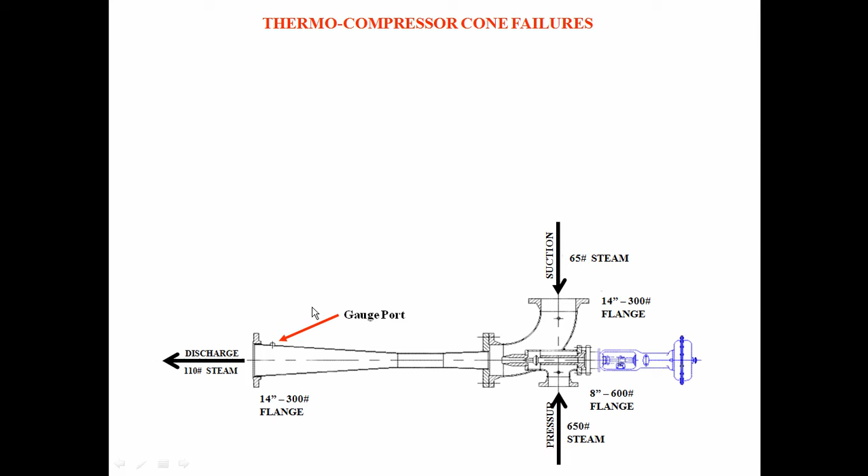Alright, here's the thermocompressor cone. Now what this component does is it takes steam from the powerhouse portion of the paper mill and sends that steam to the paper machine in varying degrees of quality and quantity based upon the requirements of the paper machine during the paper making process. Now this is a new system that has been started up for approximately 2 months prior to the initial incident.

The initial incident occurs at this gauge port. Now this is a field installed gauge port. It's a 3/8 inch threaded half coupling that they're using for a thermowell. And what happens is a crack develops in the fillet weld of the thermowell, goes all the way around it, and propagates into the base material of the thermocompressor cone. Now this occurred approximately 2 months after startup.

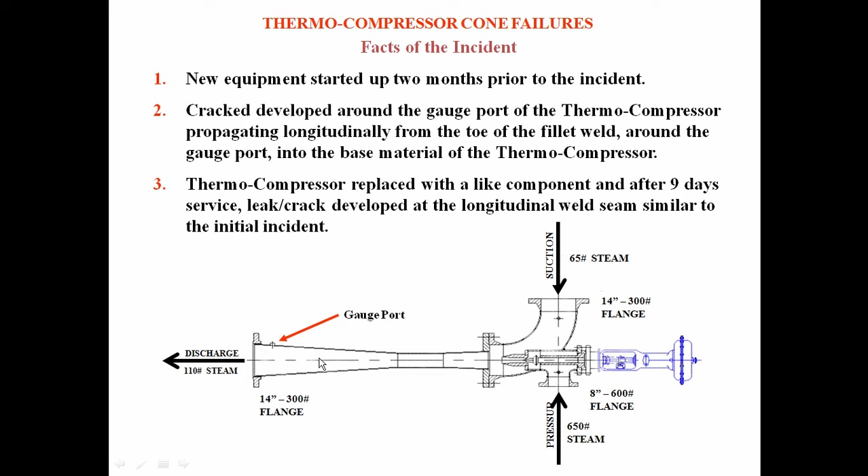So they change it out with a like component. This time they left this gauge port out in an attempt to fix the problem. But what happens now is after only 9 days, a crack develops in the seam weld of the thermocompressor cone, goes in this direction towards the large end to the toe of the seam weld, and propagates into the base material. Then it goes in this direction right down the center of the weld and makes this big Y pattern. And this is what the two failures look like.

Now this is very unusual to me. The weld should structurally be the most sound part of this component. So how can the crack go down the center of the weld and then into the base material? I'd be happy if the initiation point was over here in the toe of the weld, but the initiation point turned out to be over here in the center of the weld. So these are some answers that we're going to have to find.

Okay, let's look at how we analyze this problem. We have reoccurring thermocompressor cone failures. Since we have two failures, that makes this chronic, therefore reoccurring. And we've got two known failure modes. The welds have failed, and the base material has failed. And we have to account for both of these in order to solve this failure.

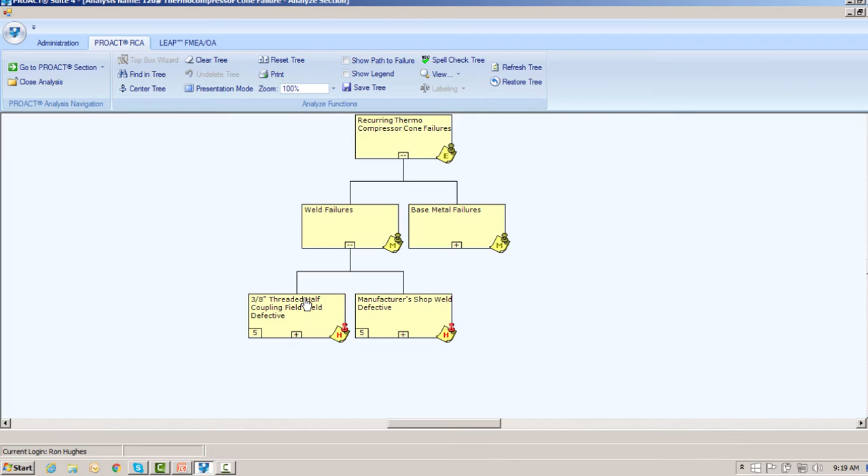So we ask the question, how can the welds fail? Well, we've got two welds. We've got the field weld that was made on site for the 3/8 inch threaded half coupling, and we've got the shop manufacturer's weld. Now we do 100% RT on the welds, and obviously they failed. And we asked ourselves, okay, we'll start with the 3/8 inch threaded half coupling. That was the first failure.

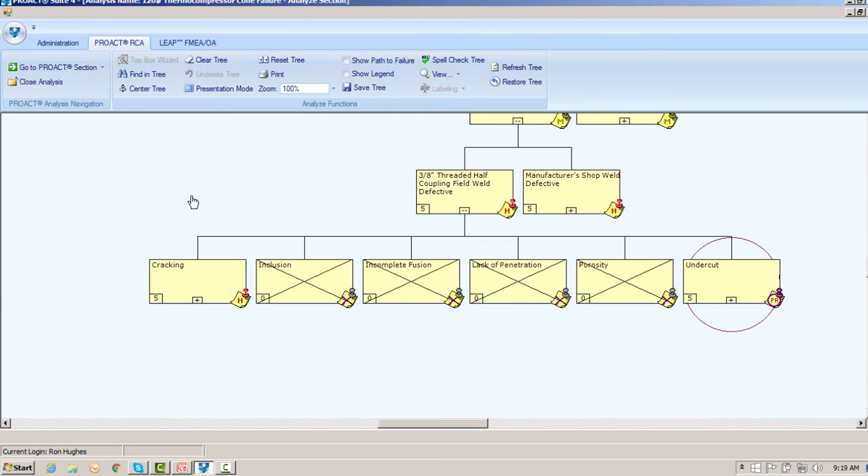How can that happen? And we say, okay, standard defects in the welding industry. Standard defects include cracking, inclusions, incomplete fusion, lack of penetration, porosity, and undercut. Okay, now I really don't need an RT to see the crack. I do that by visual examination, verify it. The outcome is, okay, cracking is evident by visual examination. And if we look at it, we can look at the crack closer. And here you can see it.

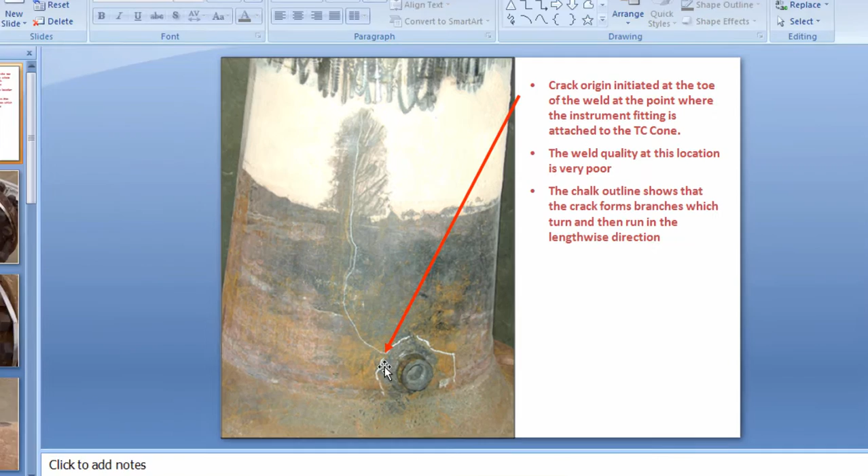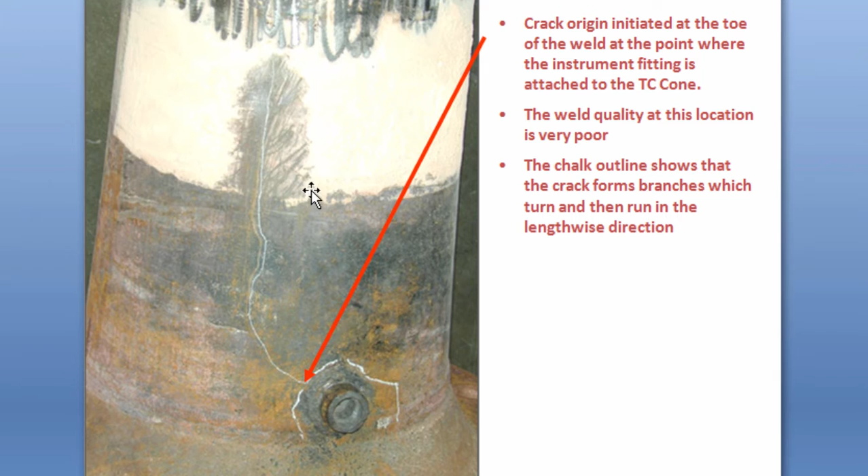Now aesthetically, this is a very ugly weld. However, it is fully fused and it is fully penetrated. So it should have held. It didn't hold. So we're going to have to account for that. And of course, we're looking at how the crack propagates into the base material. But when we get over here and we start looking at this, let's make this a little bigger.

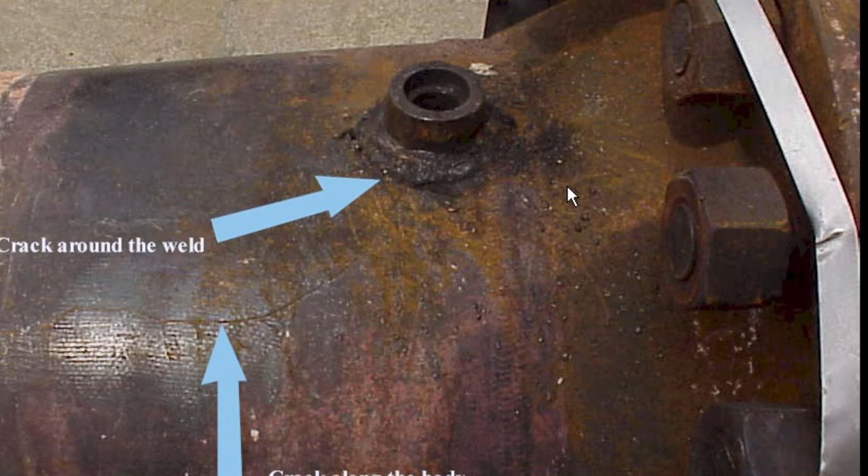If you notice all the weld pattern. Also notice the coloration, going from a straw color to a deep purple or black color. Now this tells me, and I'm going to end up proving it, that this was either welded with too much heat or it was welded wet, which I sincerely doubt. There's the hole I was talking about. Okay?

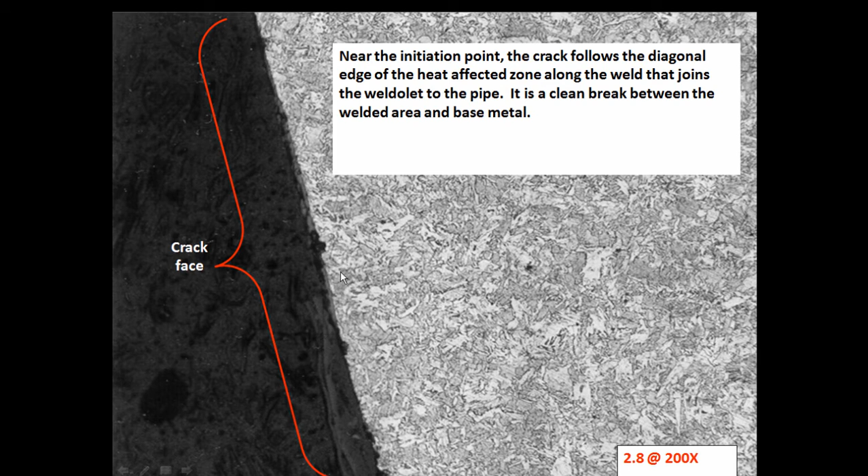This right here is the RT. This is actually metallographic analysis. And this shows the crack edge here, and it follows the diagonal edge of the heat affected zone. So it's at the fillet.

Now, we didn't cut this out. We went over with a ball peen hammer and just basically tapped it and it popped right out. And when I look at this, just looking at this, coloration tells you a lot. Going from this mottled gray color to a sharper crystalline color, this tells me this was probably never stress relieved, and we're going to end up proving that also.

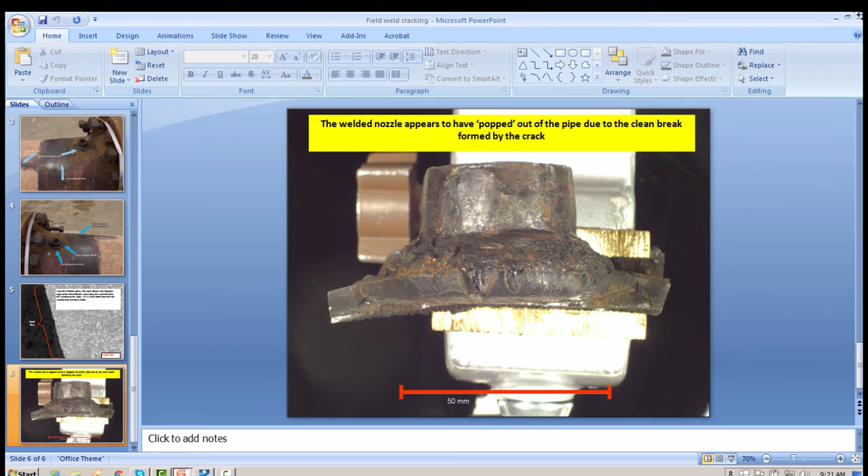Okay, moving right along. So the field weld is definitely defective. Now we did look in the RT and we found no inclusions, no incomplete fusion. It's fully penetrated. There's no porosity in the weld, and undercut is evident by visual examination. How can we have cracking?

Whenever you have a component fail, it typically fails in a combination of these 4 reasons: erosion, corrosion, fatigue, and overload. Now we visually inspect the weld. There is no evidence of erosion in the weld. Also, there is no evidence of corrosion in the weld. Now notice here we got fatigue. Continue at fatigue under manufacturer shop weld defective.

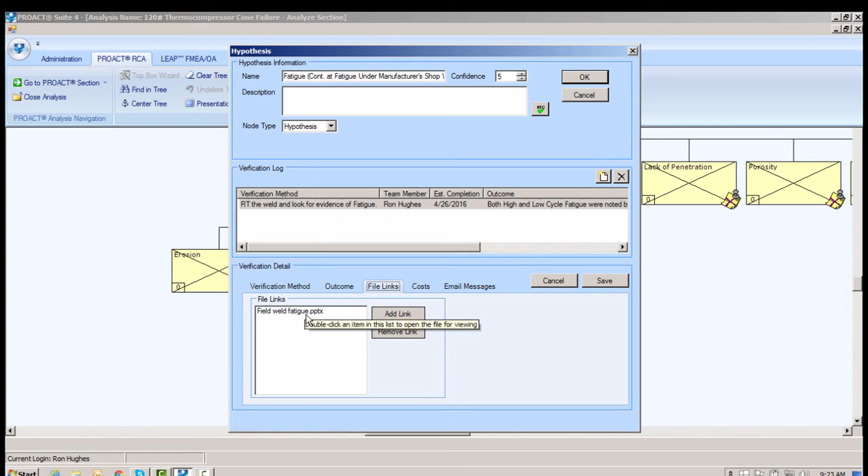That means the logic below here is going to be identical to what we're going to see over here in the manufacturer's weld. But we go in and we RT the weld, and what we find is we have indications of both high cycle and low cycle fatigue. And we're going to look at some of our verification proof here. And what you see here, this again is metallographic analysis. This is a single branch crack.

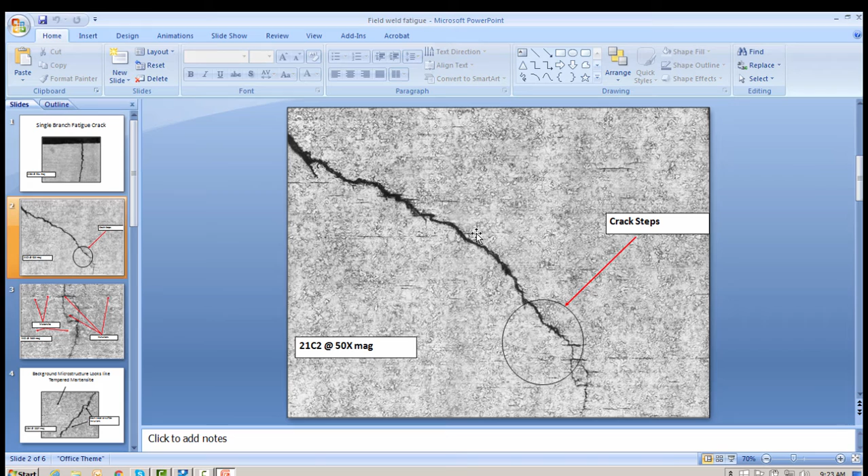Over here you can see the crack steps. Now what it's doing is, you see these lines in here? These are actually sulfide inclusions. And the crack is stepping along the weak points. Sulfide inclusions are like voids in the metal. And it's actually stepping along these weak points. And also what you see here is martensite. Now this background martensite tells me it was never heat treated.

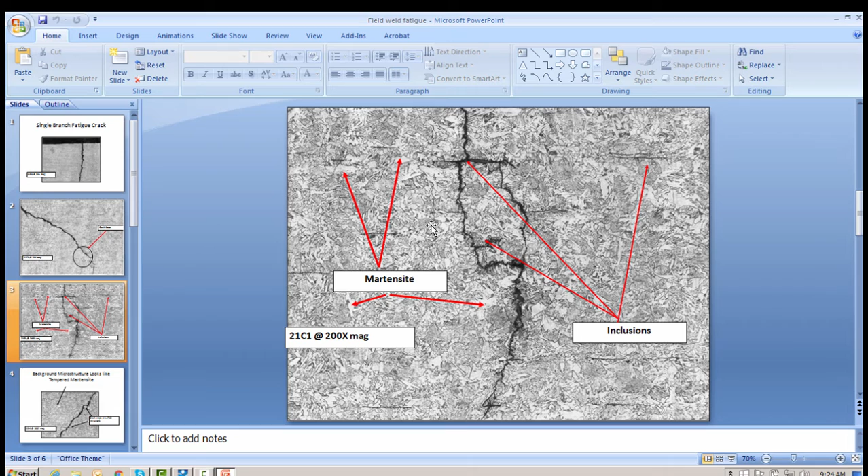We'll start with that. The only way you can have this martensite on the surface of the weld is in the crystalline structure during the welding process. You go from what is known as body center cubic to face center cubic. Now what happens is the carbon atoms in the center of the crystal, the metallurgical center, are migrating from the center of the crystal to the surface of the crystal. And when they settle on the surface like that, they form martensite.

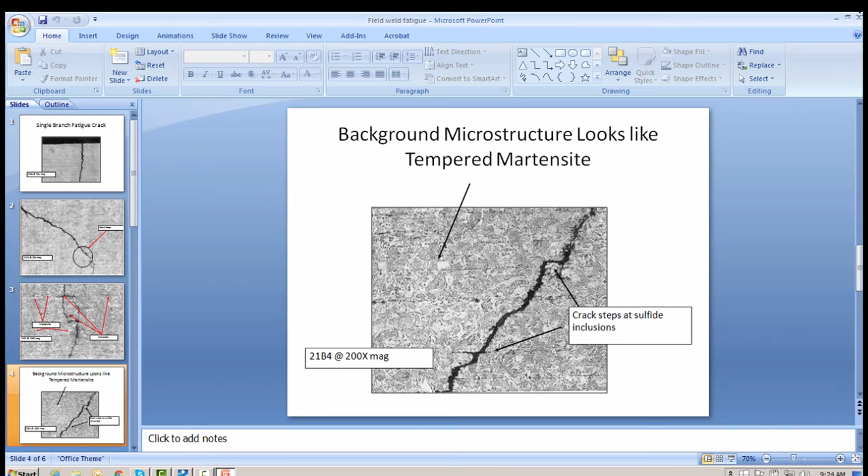Martensite is very, very hard. And this is a good picture of the tempered martensite, where it has gone from body center cubic to face center cubic. Okay, so fatigue is verified. Obviously it's overloaded. The crack itself tells you that it's overloaded, and you notice again continue at base metal defective, which we're going to explore further over on the base metal section of the failure modes. Okay, so that answers that.

Now let's go over here and look at undercut. Undercut is the welding process itself. Undercut is evident by visual examination. So how can we have undercut? Well, either the weld's made properly and we have undercut, or the weld's not made properly. And obviously the weld is not made properly, or we wouldn't have undercut.

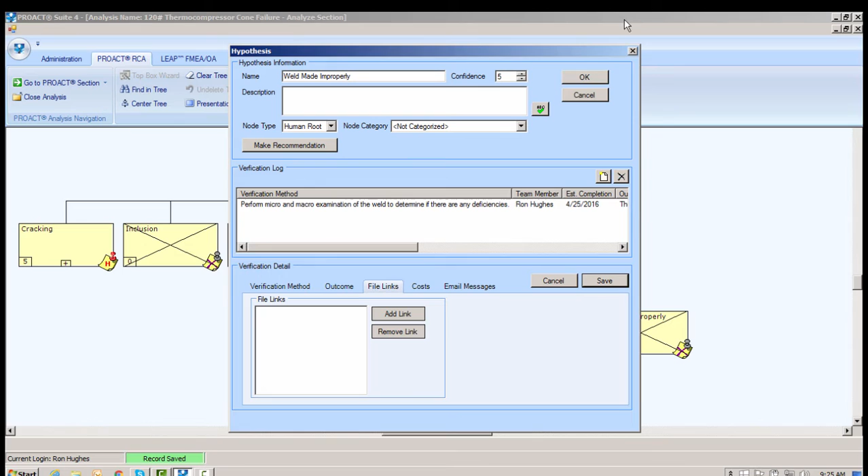Also, we do micro and macro examinations, and we can see the defects in the weld. And the defects is the weld has a crack, an obvious undercut at the toe of the weld. In addition, the RT indicates secondary cracking in the weld. Okay? That means the weld is made improperly.

Well, how can that be? Well, either the welder's not qualified or the technique is defective. We checked the welder's qualifications and certification. He is certified in accordance with ASME Section 9, so he's a certified welder. The technique is definitely defective, so we look at that examination again, and this is what we find.

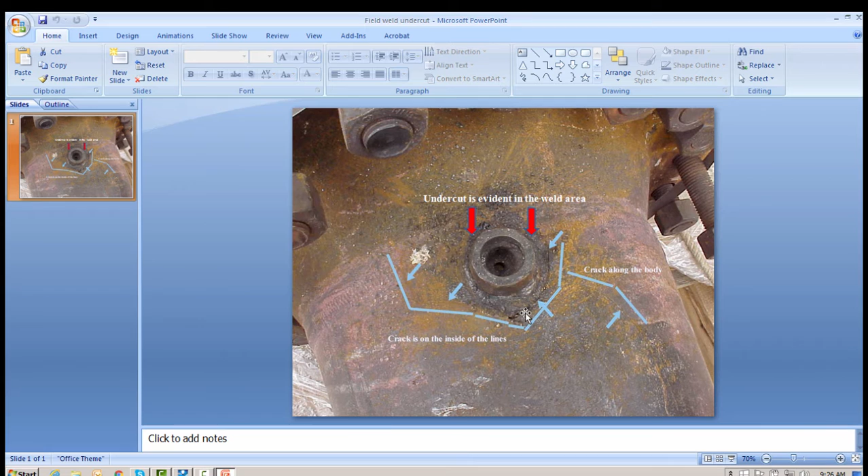We can readily see the undercut, and we can readily see the cracking, and we can also see now and know for sure that it's been welded with too much heat. What has happened here, because of all that heat that we see, the weld's been welded at about 1,000 degrees Fahrenheit, never stress relieved. Now here we say didn't follow procedure.

We're actually being politically correct here. The welder didn't actually have a procedure. We interviewed the welder, and what we find is, he was told, okay, you know how to install a thermal weld, go out there and install one using your experience and best practices. So that's exactly what he did.

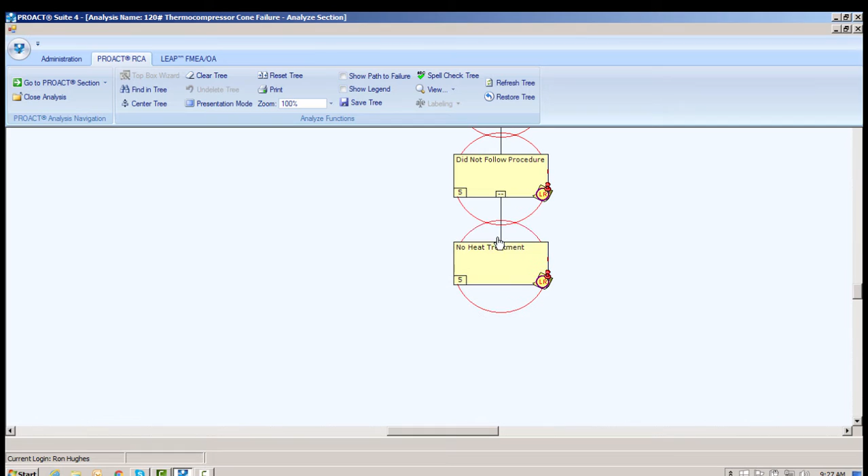He went over and he selected an E7018 rod, and of course he installed the field weld with a one-hander and just put it in. So he made the weld without a formal weld procedure specification. So we say didn't follow procedure, didn't actually have a procedure, and we say, okay, no heat treatment, stress relieve the heat affected zone. And we look at that, and obviously from what we see in our microscopic examination, we can tell that there was no heat treatment in the heat affected zone.

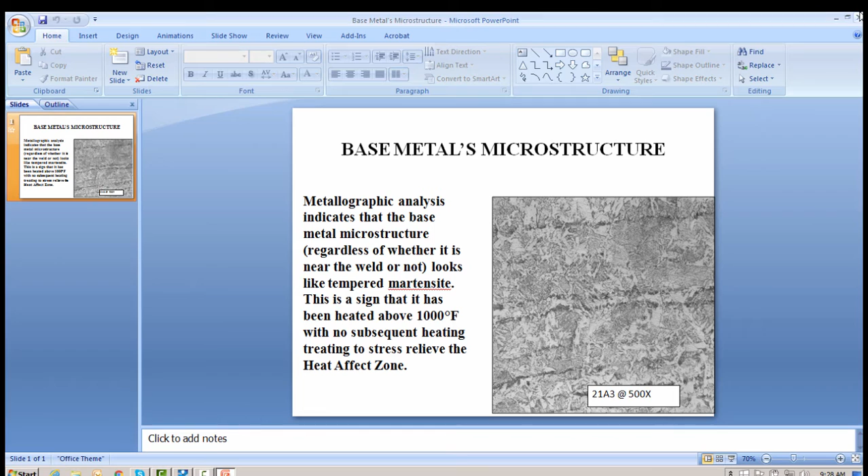So that answers that. And that takes care of the field weld. Now let's go look at the manufacturer's shop weld. Alright, again we have the same welding defects. Inclusions, incomplete fusion, lack of penetration, porosity, undercut, and cracking. Now notice over here we got inclusions, continued base metal defective. Okay? Now we do the metallographic analysis and we see the inclusions.

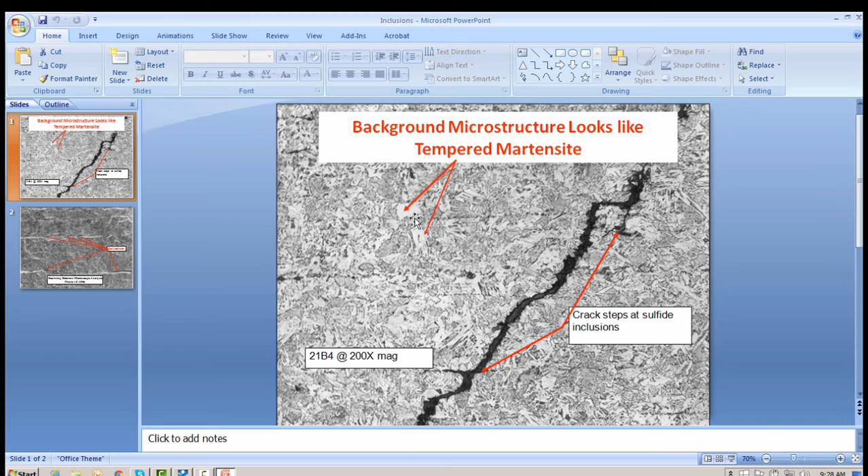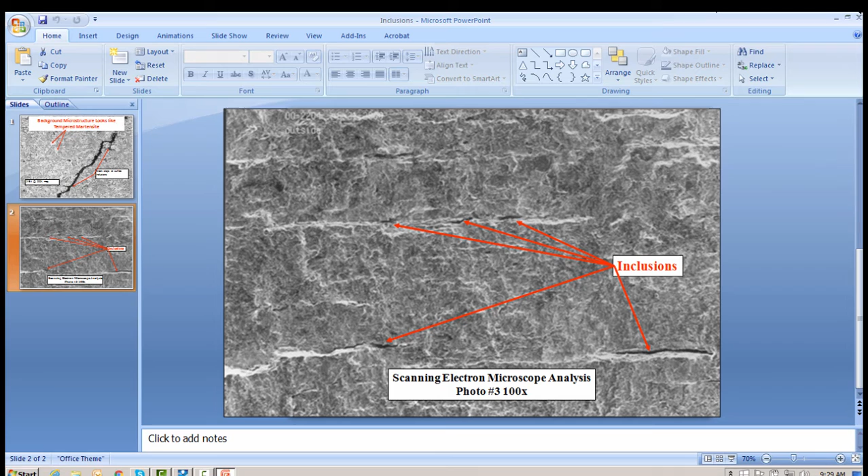Sulfide inclusions were found in the material, and the crack steps along the path of the voids, that's the weak points, created by the inclusions. And you can actually see the inclusions very clearly in the x-ray. Here's the background martensite. And when we go over here, you can see the inclusions. This is scanning electron microscope analysis here. You can actually see the inclusions. They look like voids in the metal, and those are weak points in the metal. And of course the crack is seeking the path of least resistance, which is the voids. Okay?

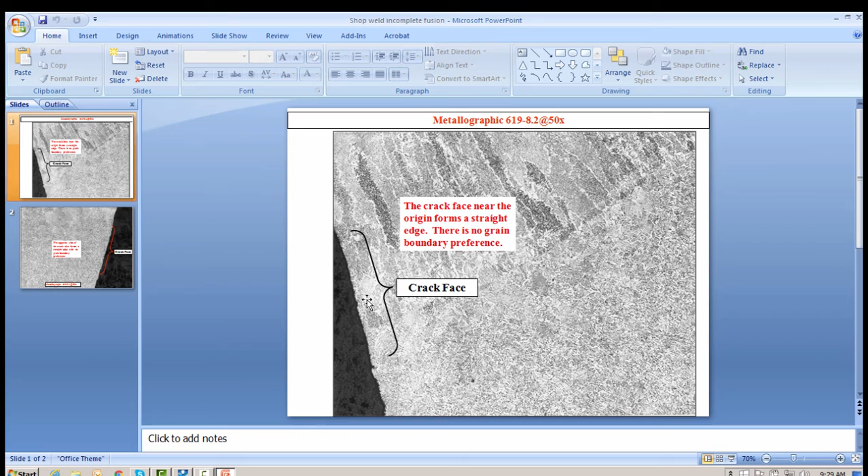Now cracking, again, cracking is evident by visual examination. But let's look at incomplete fusion here. We actually do have some incomplete fusion in this weld. Okay, so we RT the weld and we look for areas of incomplete fusion, and there are some areas that are not fully fused. And if we look at our x-ray, here we go, we can see the incomplete fusion here. There's no grain boundary here. That's what that is. Okay, and of course this is the other side of that particular weld. So there is some incomplete fusion in this weld.

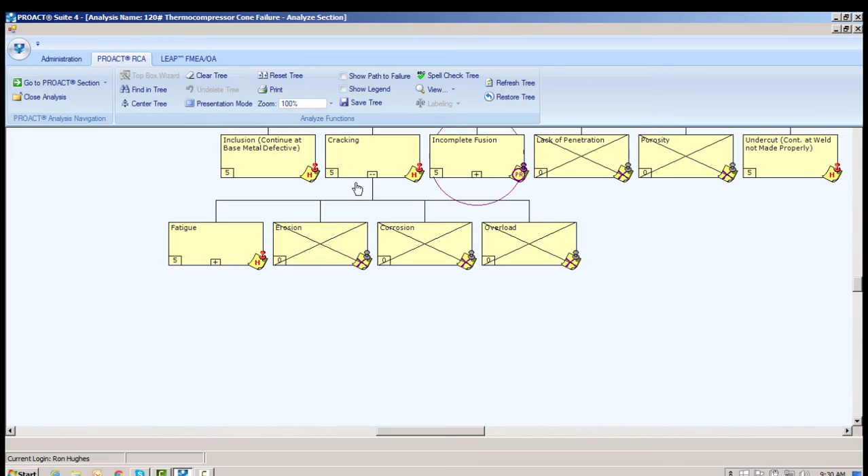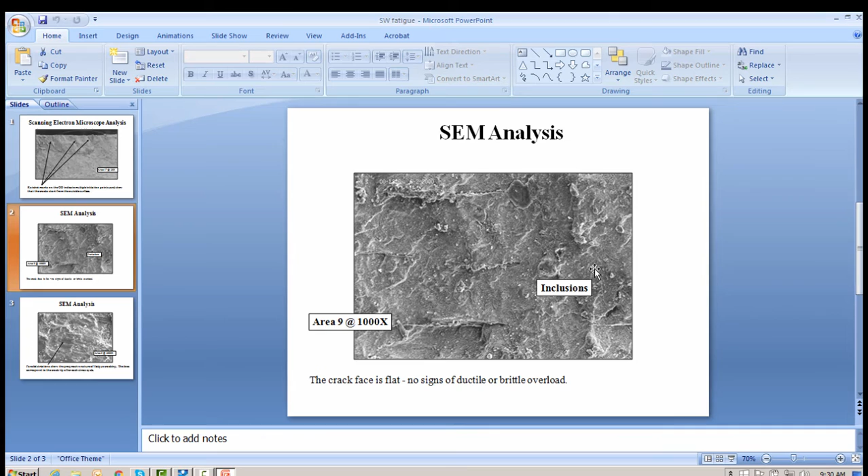And we go over here, we see that the crack is very, very flat. Again, this is scanning electron microscope. And there is no sign of ductile or brittle overload. Now what this tells me is the crack goes all the way through the weld and all the way through the base metal. So it is propagated entirely through the component. Now here, these are striations here. These are what we call fatigue striations.

Now the fatigue striations occur at low cycle fatigue. They have high amplitude, low frequency. Fatigue striations prove low cycle fatigue. So the striations prove low cycle fatigue, and the ratchet marks prove high cycle fatigue. Ratchet marks occur when we have overlapping fatigue planes. Okay, so we've proved that we have two types of fatigue going on, and we're going to have to account for both of them. Alright, so we have the two types of fatigue.

We have excessive vibration, which is high cycle fatigue, and we have thermally induced, which is low cycle fatigue. So we've proven both, so how can we have high cycle fatigue? It's either mechanically induced vibrations or process induced vibrations. Okay? So we walk the system down and we start taking some sound level measurements, some dB readings. And what we're looking for is indications of high cycle fatigue. The dB levels range from 98 to 127. It's like standing next to a jet engine. These high levels, 126, 127, were taken right at the thermo-compressor cone.

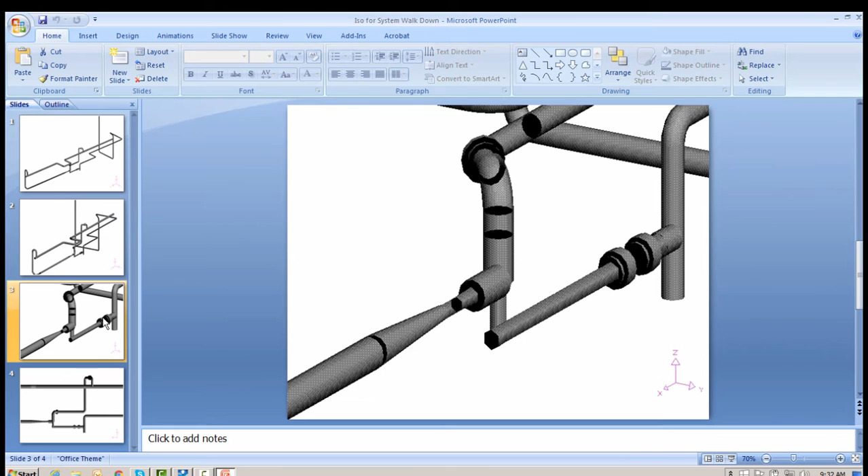Now when we look at the piping supports, which you're going to see, we note that not only are the piping supports adding to these dB levels, but because of the way the piping is configured, I have a question about the vena contracta, which is the point of highest velocity at lowest pressure in the design of the thermo-compressor cone itself. And this, of course, is the ISO where we walk the system down, and we're going to be taking all the dB levels at all these strategic points. Okay?

So we have mechanically induced vibrations. Our decibel readings tell us that. Either we have inadequate piping supports and inline components, or we could have had resonance from outside sources, like the paper machine. We actually rang the frequencies, the required frequencies, the bases and stuff, to look for resonant frequencies, and we couldn't find any.

But let's look at the piping and supports. So we inspect the piping and support system, and this is what we find. During the walk down and visual inspection of the system, it was noted that several of the trapeze hangers were not supporting anything. The piping wasn't resting on the hangers. Some of the variable spring can hangers were bottomed out, and we actually had stud assemblies that were broken.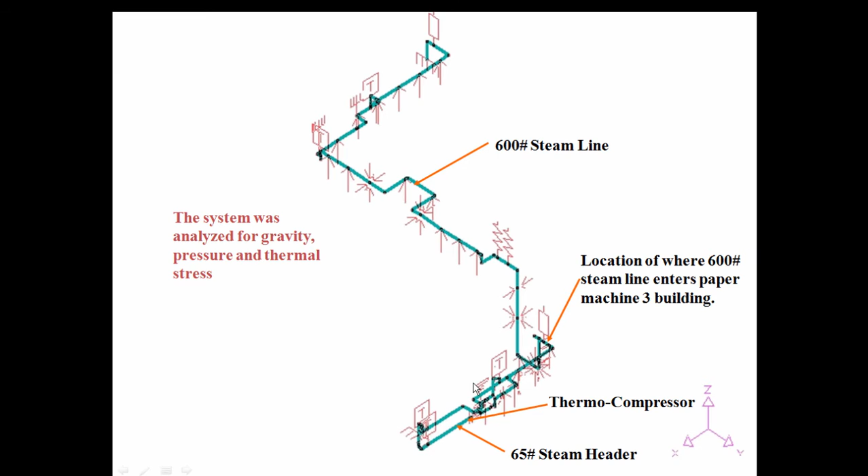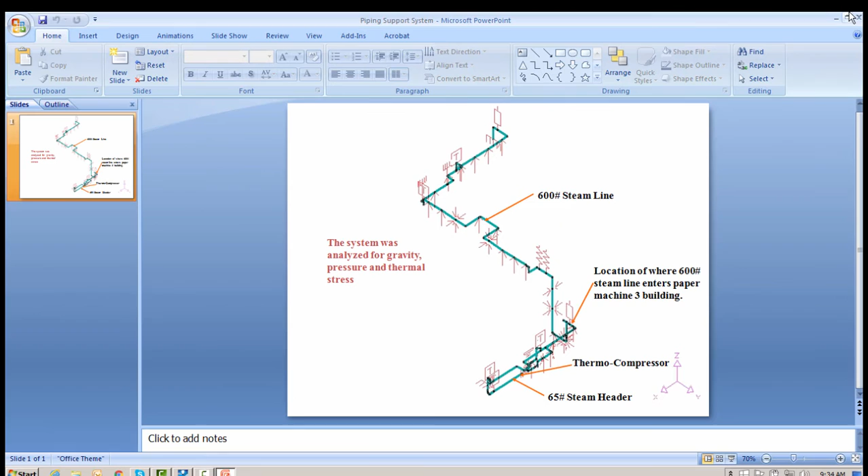And this is what the piping support system looks like. This is the stress ISO. And we go through and we note where the spring cans are bottomed out, which stud assembly is broken, where the trapeze hanger is not supporting the pipe. As a matter of fact, the location of the trapeze hangers is not supporting pipes right here at the thermo-compressor, which is really bad. And this is definitely contributing to the mechanically induced vibrations that we're seeing.

That's the physical root. Well, how can that be? Well, we could have a system support design error, valves contributing to the mechanically induced vibration, or a thermo-compressor design error. Notice we got TC cone vendor didn't understand the operating environment. And we'll talk more about that in a little bit.

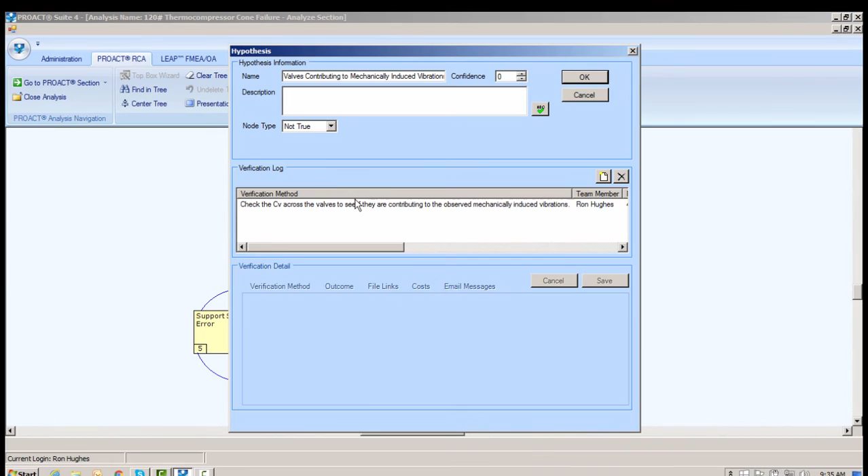First thing is the Cv across the valves. We actually looked for problems with the velocity across the valves, and we couldn't find any, so these are not contributing. We actually checked the Cv, and all velocity and pressure drops are normal and not contributing to the observed mechanically induced vibrations. Now, we've already talked about the piping supports, obviously, but we have a piping support system design error. Let's talk about that.

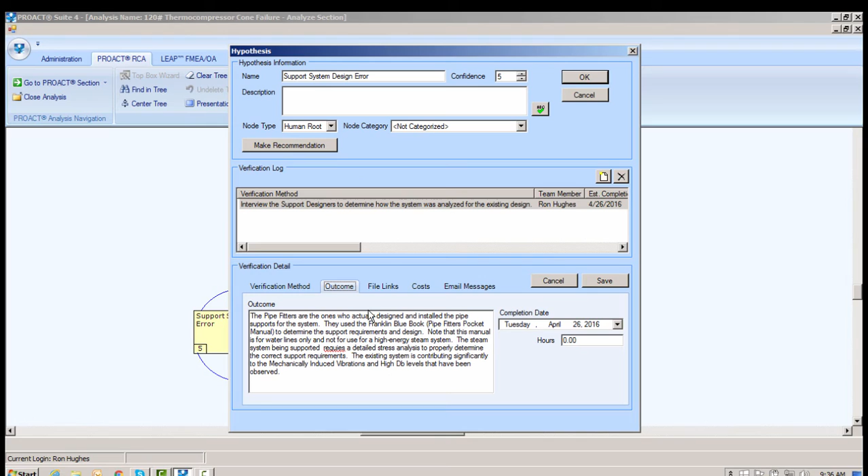We're going to talk about interviewing the support designers to determine how the system was analyzed for the existing design. Now, the pipe fitters are actually the designers. There is no formal engineering design for this system, or even a design review. Now, what the pipe fitters have done is they've used the Franklin book, the blue book. This is the little pocket manual the pipe fitters use so they can figure out takeouts for fittings and how to hang piping every so many feet based upon the size of the piping, so close to a bend, so close to an inline component, etc.

Now, the Franklin Blue Book is for water lines. This is a steam line. It's totally inadequate for determining how to hang a steam line. So what they should have done is a detailed stress analysis on the system itself, and designed it as a high energy steam line, and they didn't do that. So the existing system is contributing significantly to the mechanically induced vibration and the high dB levels that we have observed. So that answers that question.

Now, how can that be? Obviously, no formal detailed design or engineering design review performed on the support system as required. So that answers that question. TC cone design error. So we interview the manufacturer of the TC cone and we see how was this thing designed? And what we find is the manufacturer was never given any details other than the required pressure drop of the thermo-compressor cone, or specifications on the TC cone. So when we further analyze it, we find that the vena contracta is mislocated and definitely contributing to the failure under investigation. So that answers that.

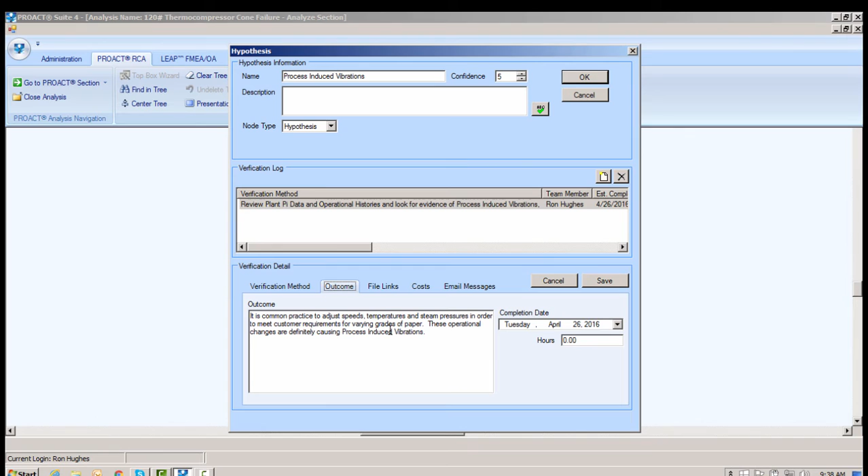Okay? So let's go over here and we're going to look at process-induced vibrations. Now here we just reviewed PI data and of course operational histories, and we're going to be looking for evidence that the process is causing these vibrations. And what we find is it's common practice to adjust speeds, temperature, and steam pressure in order to meet the customer requirements for varying grades of paper. These operational changes are definitely causing process-induced vibrations. Okay? So again, how can that be? Well, we're operating at the critical frequency of the pipe.

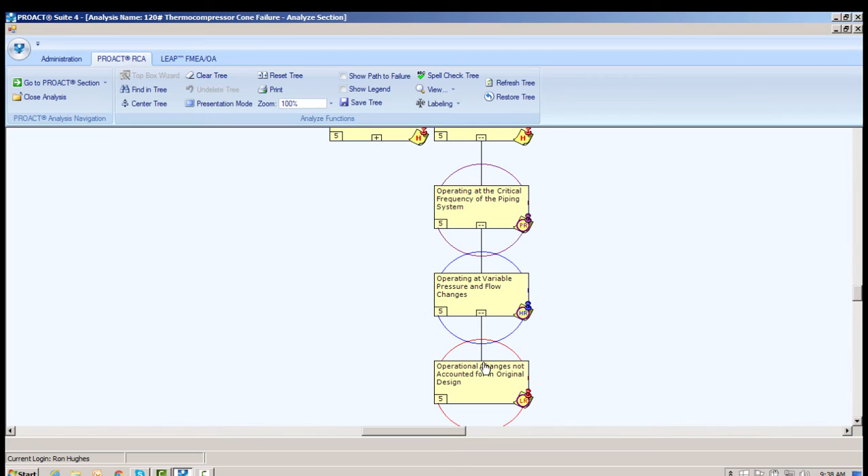So we determine the critical frequency of the pipe, and we find it to be 540 hertz, and we find that we're operating in that range. So that's definitely contributing. And how can that be? Well, we're operating at variable pressure and flow changes because what we're trying to do is meet the requirements for making paper. And these operational changes are not accounted for in the original design. Remember, this is a new system. Okay? So that takes care of the understanding of where the high vibrations are coming from.

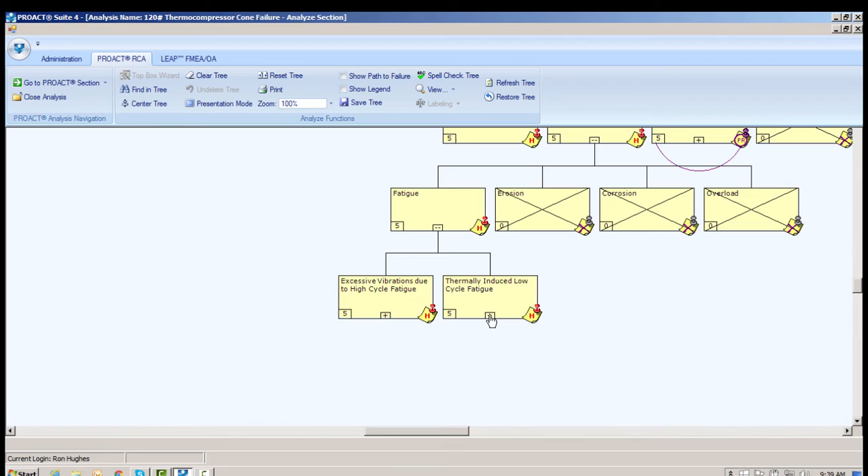Now let's look at thermally induced low cycle fatigue. So where could that be coming from? We say, okay, it's either process-related changing steam demands, which we have, excessive startups or shutdown. We review PI data and operational histories. We don't have excessive startups and shutdowns. Condensate in the system, or we have fluctuating temperatures and pressures coming from the powerhouse. When we look again at the PI data, I love PI data. When we look at the PI data, we find that the pressures and temperatures coming from the powerhouse are all within range and all very stable.

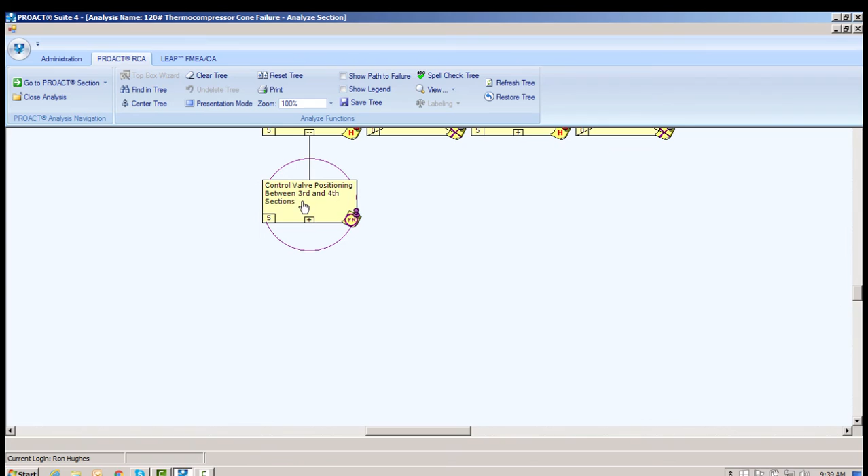But our PI data shows that we have a lot of process-related steam demand changes. And the reason for that is the control valve positioning between the third and fourth sections of the paper machine is constantly repositioning itself in order to meet plant requirements. So we're running at what we call high and low turndown ratios. A turndown ratio, of course, is how fast you take the paper off the machine, and of course that varies based upon the quality of paper that you're making. And we're varying these operating speeds to meet plant requirements. That's definitely contributing to low cycle fatigue.

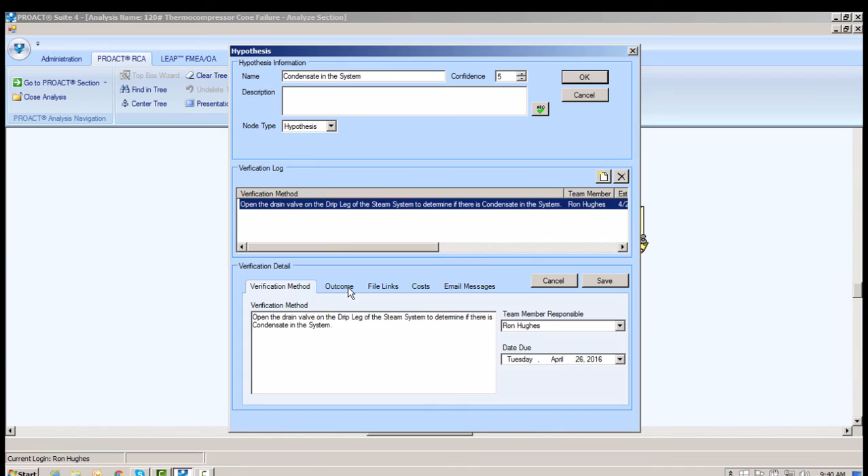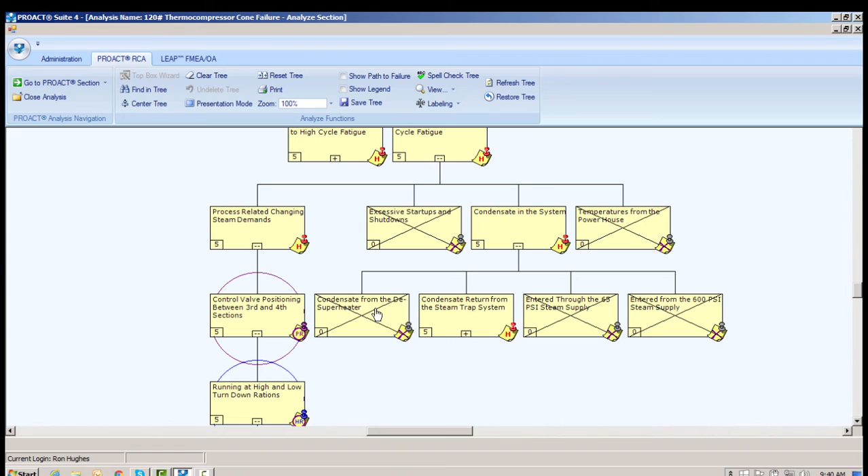Condensate in the system. Well, we go do a real fancy verification here. We go over to a drip leg, open the drain valve, see if water comes out. Guess what? Water comes out. We've just proven we have condensate in the system. So the question becomes, how can I have condensate in the system? And there's 4 potential sources for this. It's either condensate from the desuperheater. When we check that, there is no condensate coming from the desuperheater. It either entered through the 65 psi steam supply, or it entered from the 600 psi steam supply. Again, checking our drain valves, we find that it's not coming from either one of those places, but it's definitely coming from condensate return from the steam trap system.

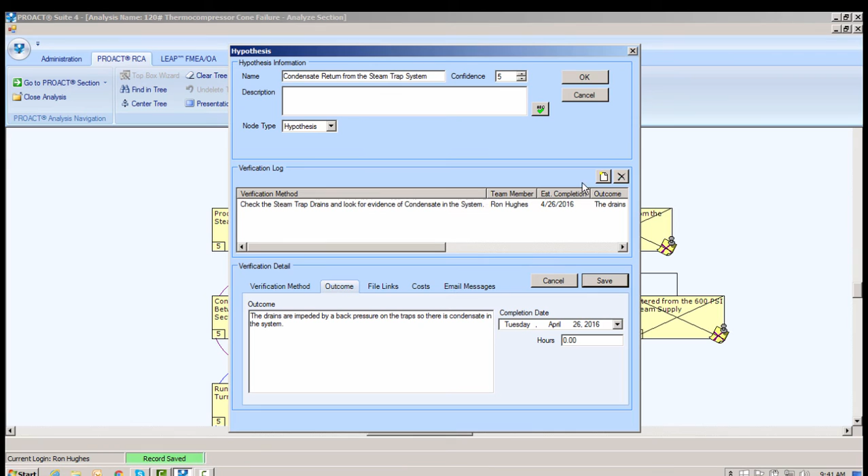When we go over and we check the steam trap system and look for evidence of condensate in the system, we find the drains are impeded by back pressure on the traps. So there is condensate in the system. This proves that we definitely do have condensate in the system because the drains aren't draining. Okay? They're impeded by back pressure. So how can that be? This is pretty standard in industry. We see it everywhere. The drains are impeded by back pressure because of the steam trap design deficiency, because the original design for the steam trap system is inadequate for the current design of the new system.

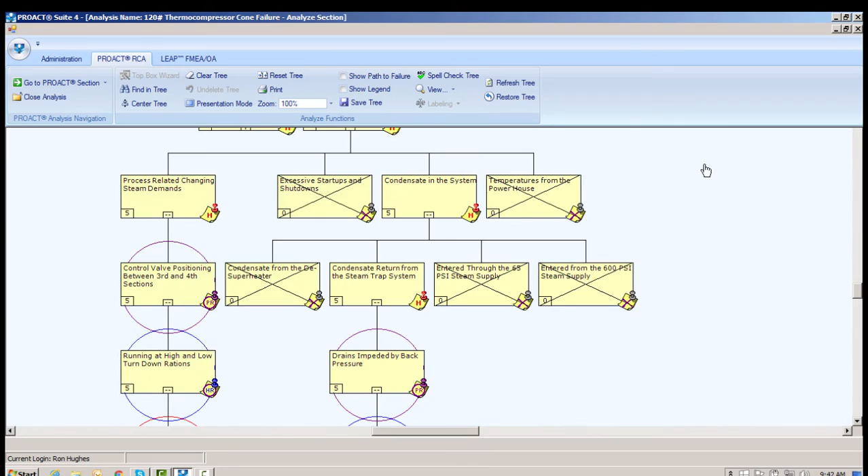And what we do here, of course, we compare the existing design of the steam trap system and determine if it's adequate for current plant requirements, and we find it's not. The current design is inadequate because the steam supply has been modified and the steam trap system was not taken into consideration during the modification. So therefore it wasn't modified, and therefore it's not accounted for under the current configuration. Alright, let's move up here. And we're going to minimize this and go over here to base metal failures.

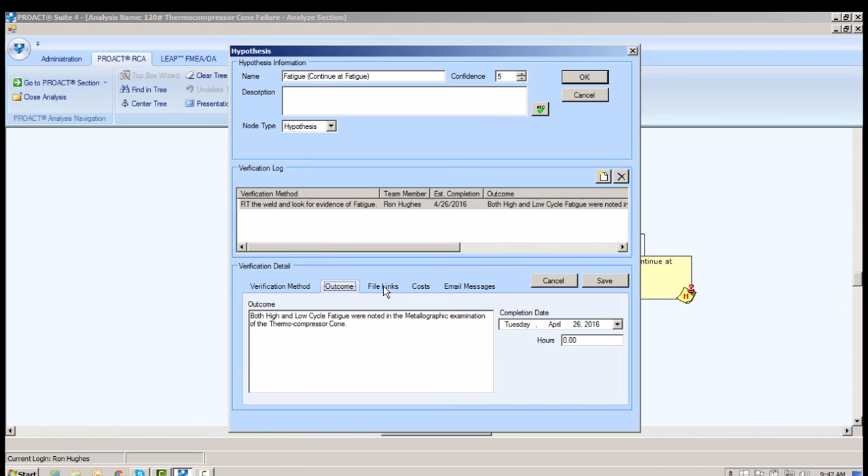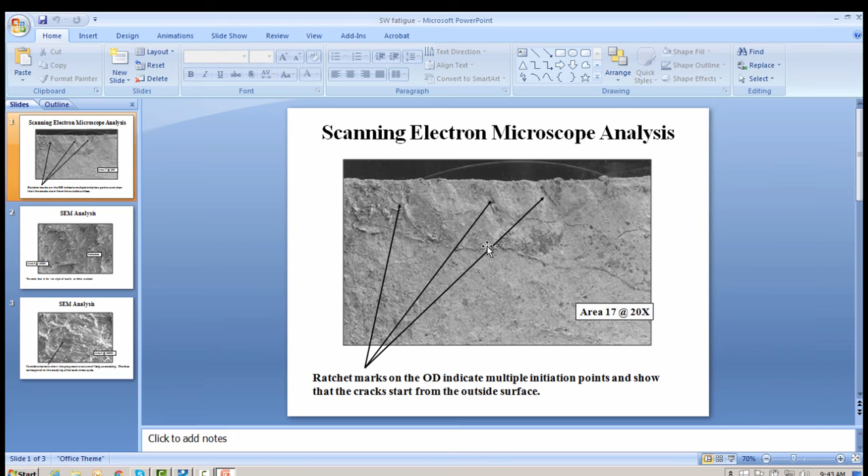Alright, how can I have base metal failures? Again, we're at the component level: erosion, corrosion, fatigue, and overload. Now notice over here under fatigue, we prove we have fatigue. We RT the weld. We see both signs of high and low cycle fatigue. This is the actual manufacturer's weld again. And we're back to the scanning electron microscope analysis and metallographic analysis. And we see both evidence of high and low cycle fatigue. Alright. Overload. Base metal defect. Okay.

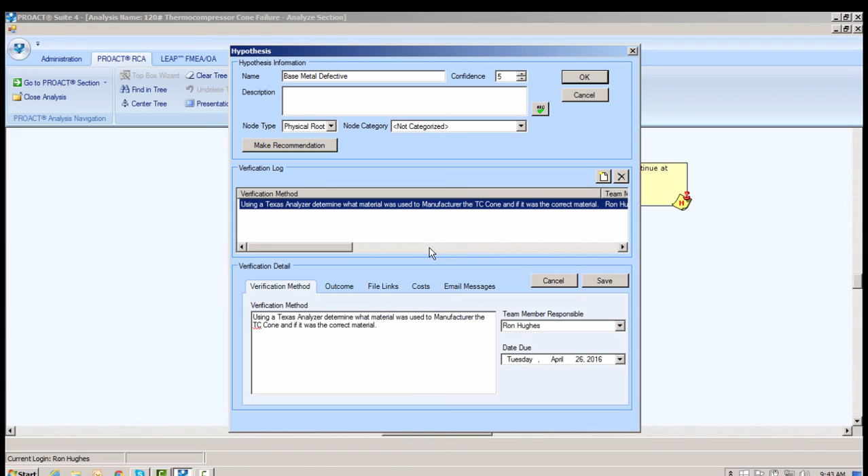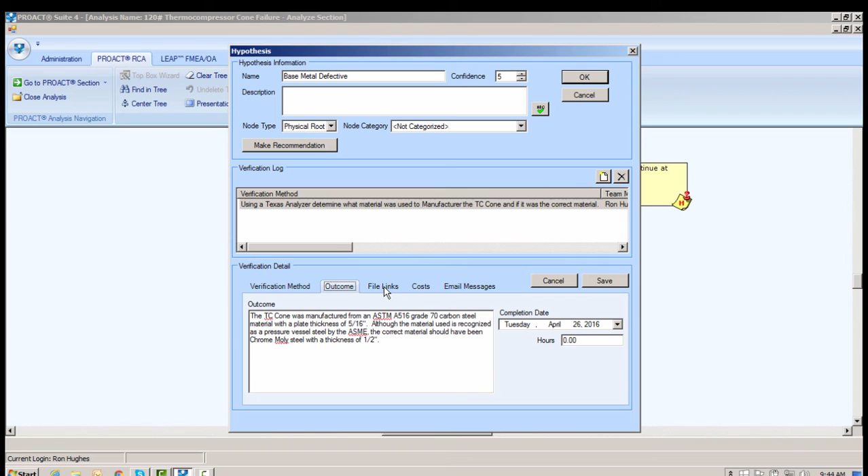So we use a Texas Analyzer because we want to verify what the base metal actually is. And we're going to look for the elemental constituents of the base material. And we find that the TC cone is manufactured from ASTM A516 grade 70 material. Now this is a pressure vessel material. This is a good material, but it's not the right material for the service that we're seeing. For the service that we're seeing, we need something with more chrome and more molybdenum to give it higher strength at a higher temperature.

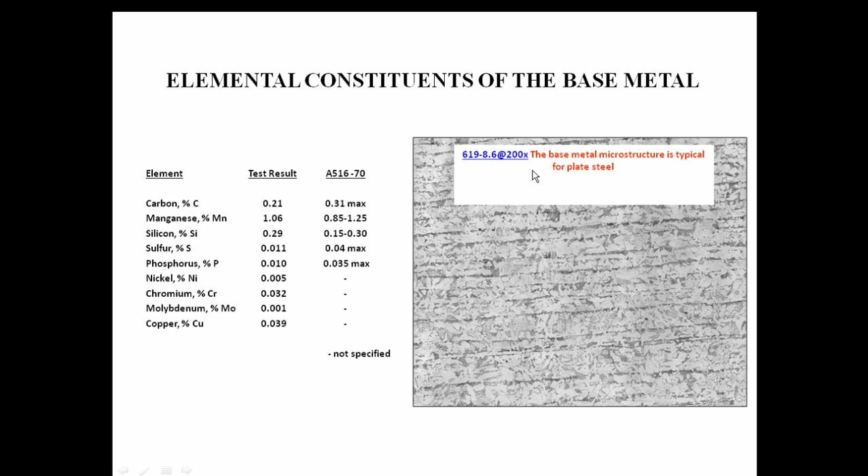And of course, here's the results of our analysis from the Texas Analyzer. These are our elemental constituents, and based upon the percentages, we find that this is definitely ASTM A516 grade 70 material. Okay, not the right material for the service. Okay, base metal defective. How can that be?

Well, it's either not made per specification or it's not specified correctly. In actuality, let's talk about this just a little bit, even though we got an X on it. We compare what was specified on the purchase order with what was originally supplied by the manufacturer. Okay? So the purchase order really doesn't specify a material specification for the TC cone. All it does is give a pressure drop criteria.

Now, the owner of the plant is depending upon the manufacturer of the TC cone to spec the correct material themselves. So the manufacturer made the cone out of, like I said, ASTM A516 grade 70 material, 5/16 of an inch thick. Okay. Now this is fine for most applications, but it's not fine for this particular application due to the pressures and temperatures that we were seeing.

So what he assumed was, okay, this worked at other places, it will work at this plant also. And that's a bad assumption. Okay, so it's not specified correctly. We do a finite element model on it. And what we find is that the material used is not adequate for the service that we're seeing. And let's look at this.

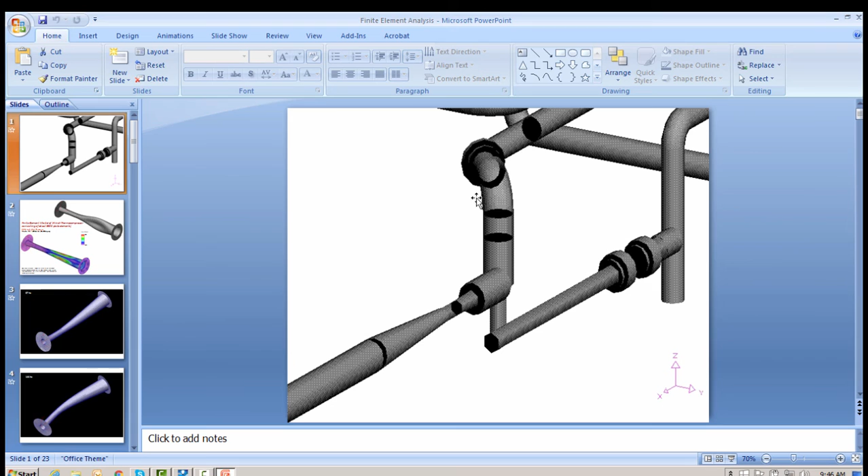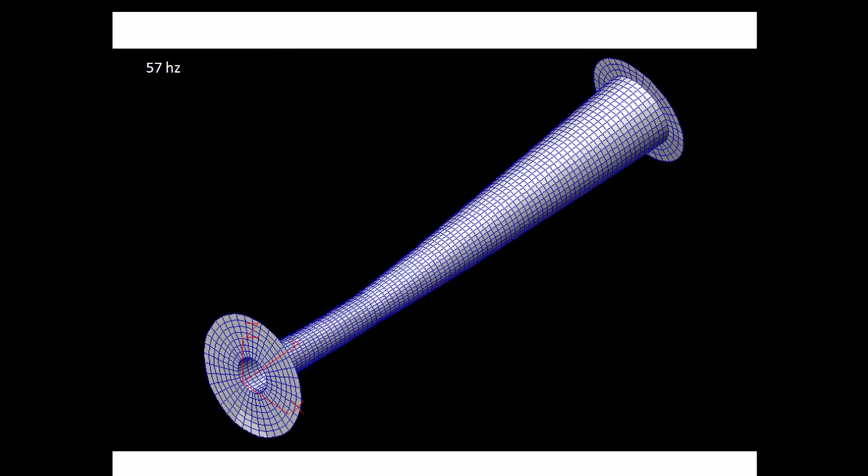Okay, now this is where we're modeling it, and what we do is we model it in 9500 plate elements. Of course, the areas of lavender are areas of very low stress, and the areas of red are areas of very high stress, and we can look at the deflection shape. And this is what we found in our model. Now this is at 540 hertz. This is the natural frequency of the pipe.

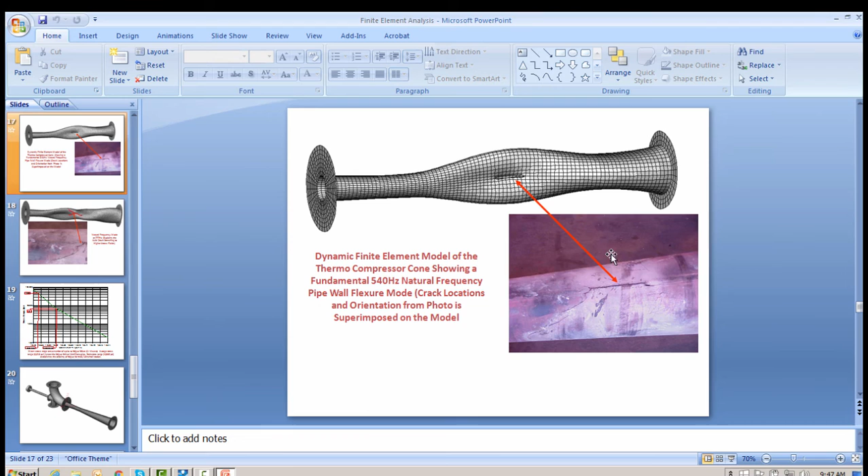Now right here is where our crack is. This is where our crack initially developed. And as you can see, look at the flexure in the model. And then we come over here to 777 hertz, which we're also seeing. Look at the model flexure. And that accounts for our Y crack.

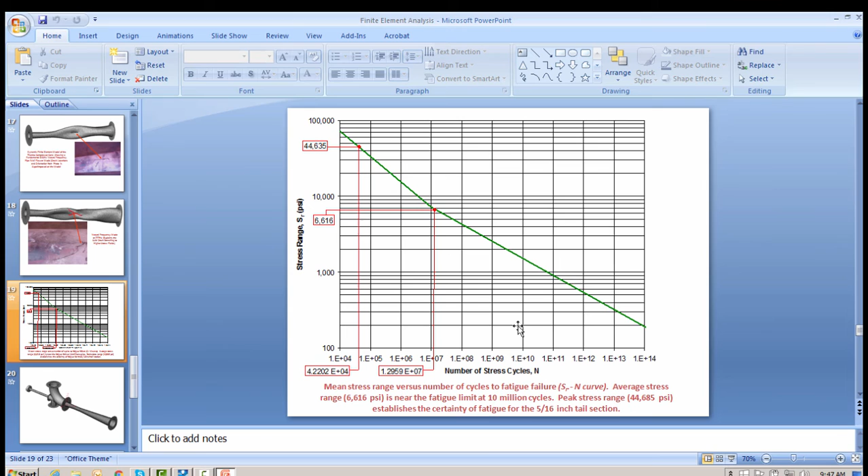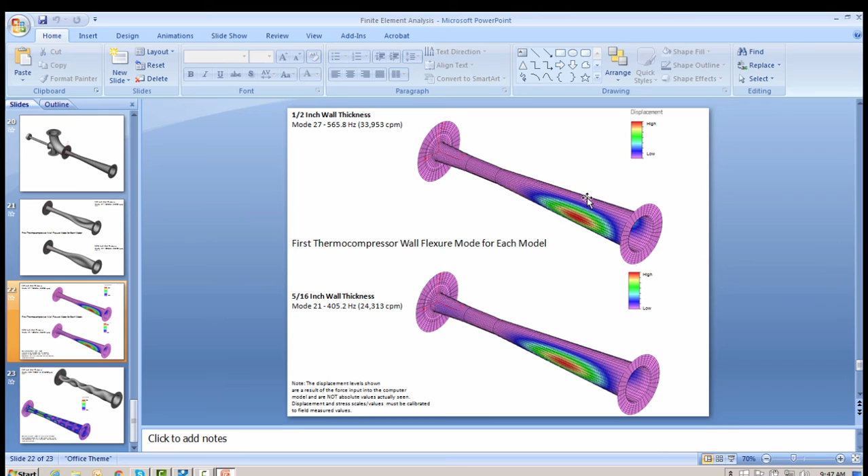Okay, and then of course we went over, this is the stress strain diagram and the number of cycles that we're using. We're figuring everything out in our model, and we compare what we're going to recommend, which is a 1/2 inch thick chromoly material, to what was actually supplied, a 5/16 of an inch carbon steel material. And we determined that, using our model, our 1/2 inch chromoly plate will definitely work for the situation that we're trying to operate in. Okay?

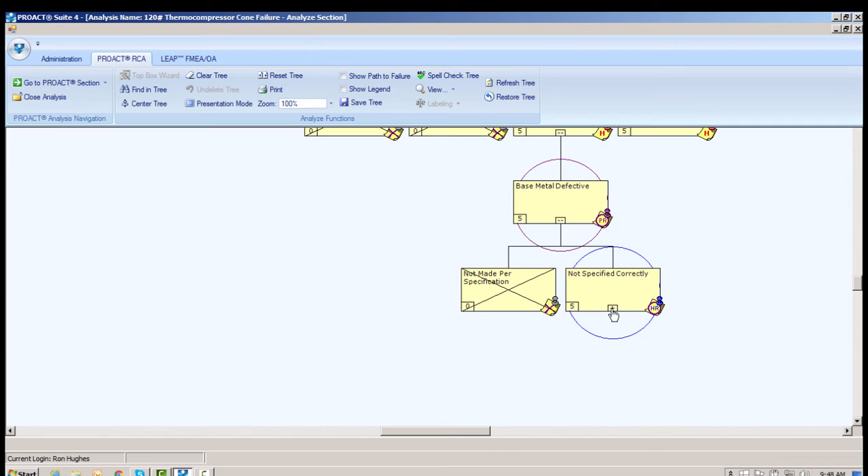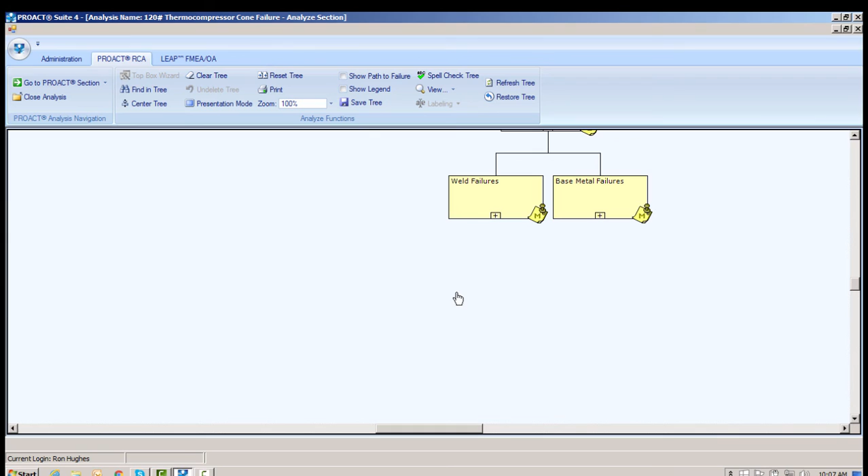So not specified correctly, because the vendor didn't understand the system operating environment, and we have inadequate component specifications for the Thermocompressor cone. Okay, this is the base metal failures. Let's look at these. Okay, how can the base metal fail? Erosion, corrosion, fatigue, and overload. Again, notice fatigue. Fatigue occurs over at the welding where we've manufactured the cone and has already been covered.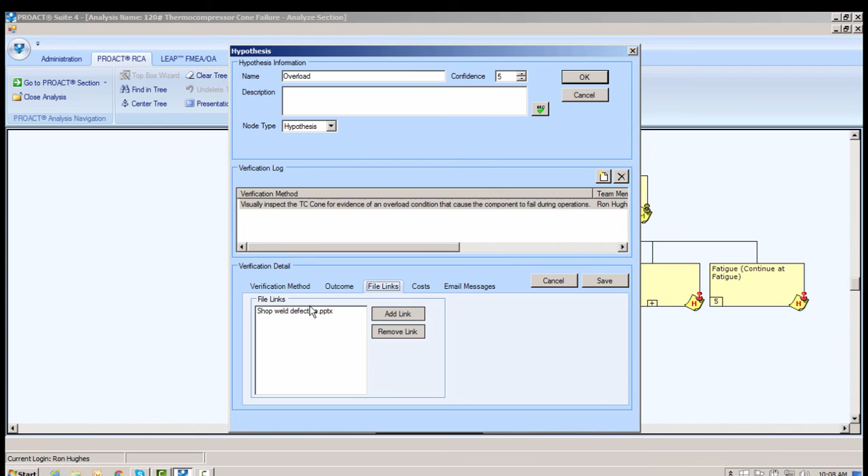But it's definitely been overloaded. So we, just by visual examination, verify overload. And we can see from my pictures here, it's obvious that the weld is cracked and definitely overloaded. And when we get over here, this is the initiation point. Now, the way we know this is the initiation point is we actually look at the chevron marks when we cut this thing up, and you're going to see where we cut it up.

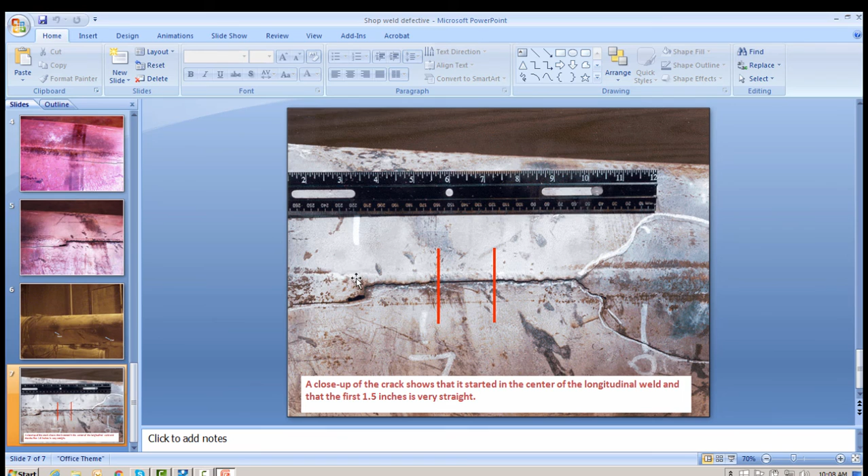And the chevron marks go in this direction, and they go in this direction. Now, where the chevron marks come together, the arrows come together, that's the initiation point. And the initiation point is right in the center of this very straight crack here. So that's where the failure started, and it propagated that way, and it propagated that way. Okay? So it's definitely overloaded. So how can it be overloaded?

Base metal defect. Well, again, we go in and we look at the Texas analyzer and see what we got, and our finite element model showed us what we needed, which was chromoly steel versus the carbon steel that was supplied. But we also did some Rockwell hardness testing. So we do Rockwell hardness testing to determine the base material's hardness and whether or not it was stress relieved. We're going to look at the crystalline structure, and we show that, you know, we did all right.

The Rockwell hardness test proved that the material in the center of the weld and the base metal was softer than the material on the surface. This indicates the presence of martensite on the surface of the material caused by the crystalline structure of the material's piping going from body centered cubic to face centered cubic. This proves that the material was never stress relieved. And here's where we did the hardness testing.

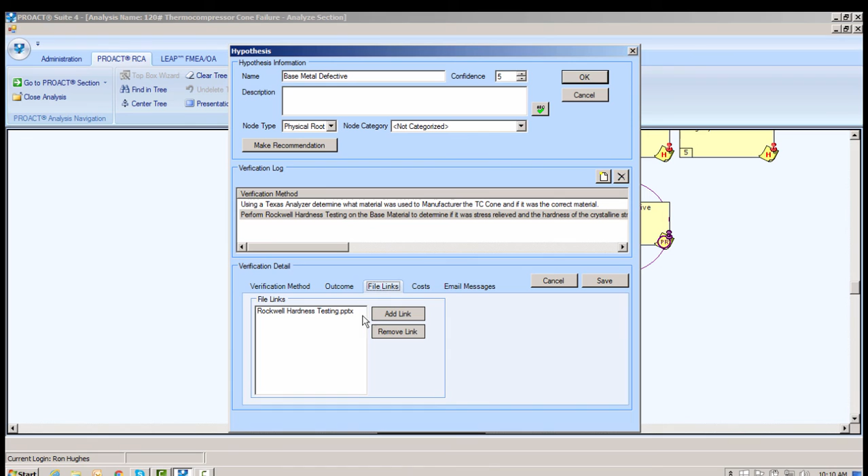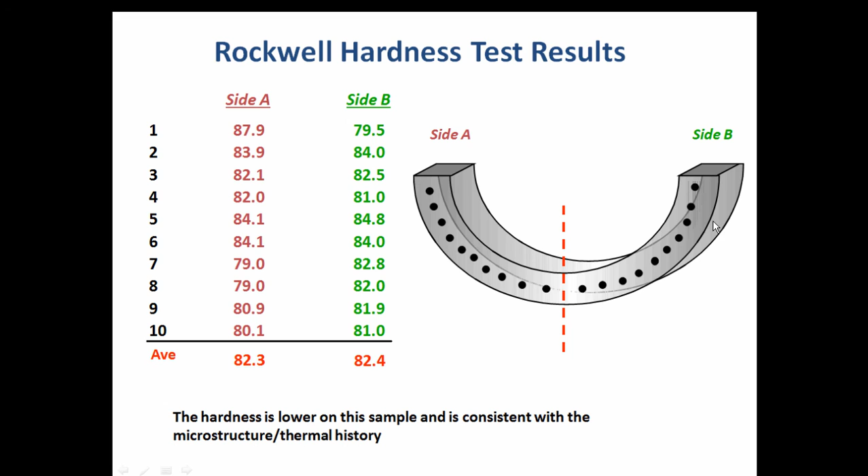We actually cut it up into several plate elements. And we're going to measure the hardness both on the surface and the center. And of course, this is SEM analysis. And what we find is the material is very hard on the surface and very soft in the center, which is what we expect. And that also proves that the base material is defective for the service. So the base material is defective. Well, either it's not made per specification or it's not spec'd correctly.

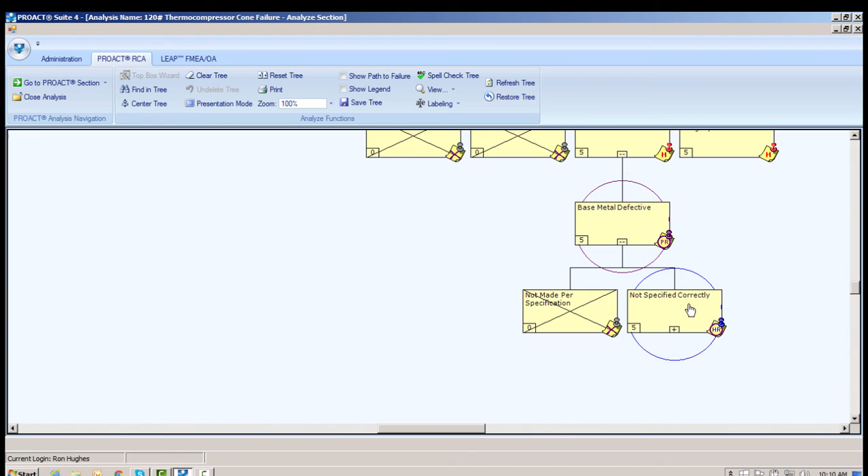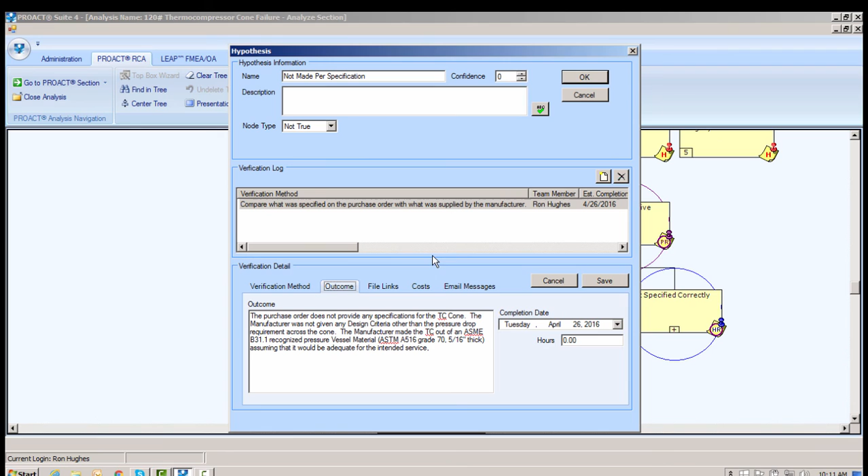Well, let's look at this. Okay, again, the manufacturer was just told, make me a thermo-compressor cone with a certain pressure drop, and he used his best judgment for the material that should be used to manufacture the cone, which turns out to be the wrong material. In actuality, he has no specification, so it is not spec'd correctly.

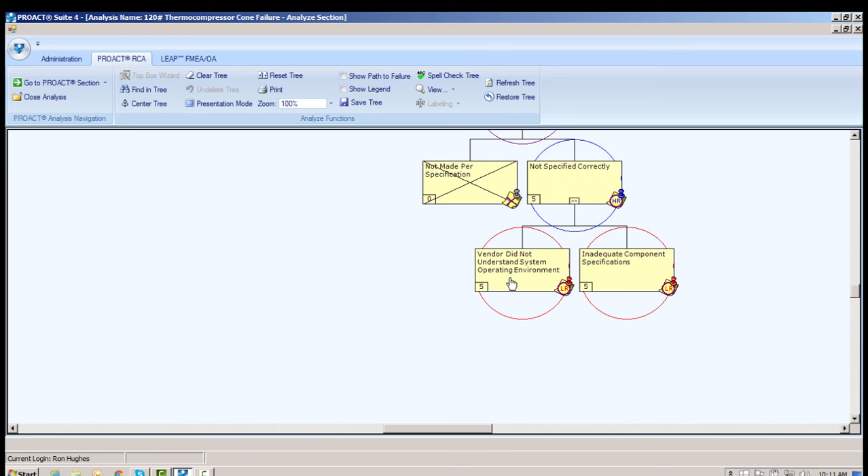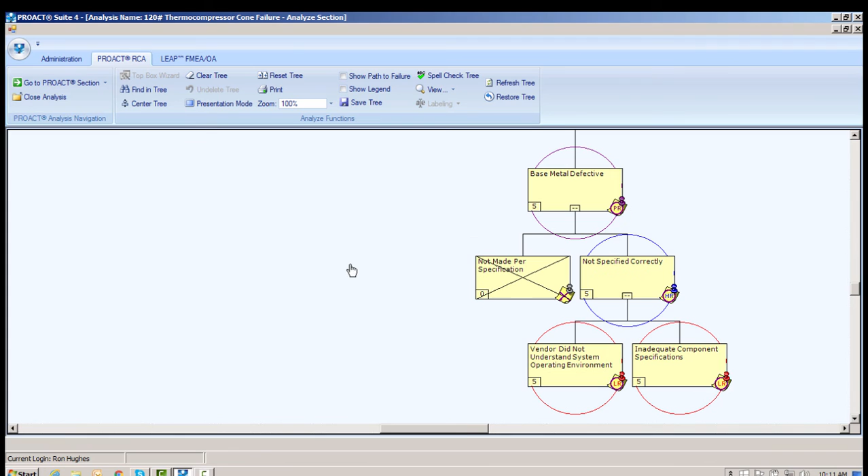So since it's not spec'd correctly, how can that be? Well, the vendor didn't understand the operating environment because the plant owner did not provide him the proper operating environment specs. And also, we have inadequate component specifications. In actuality, he had none. Okay, so let's look. That completes the analysis, and we'll just give you an idea what the tree looks like.

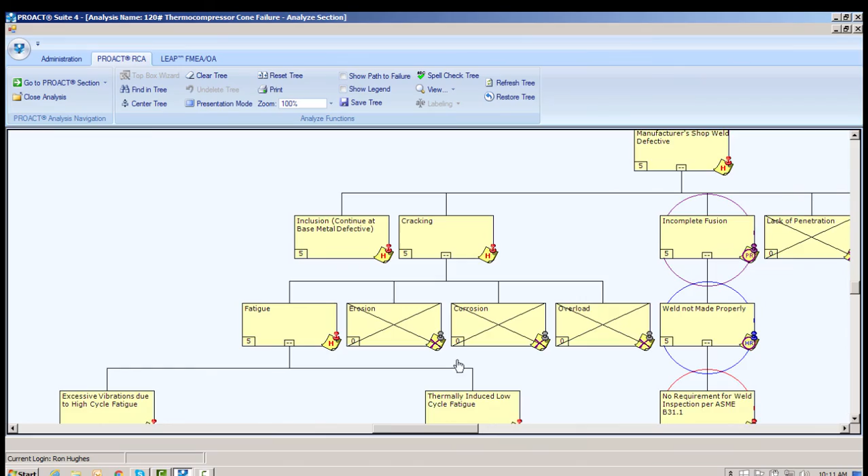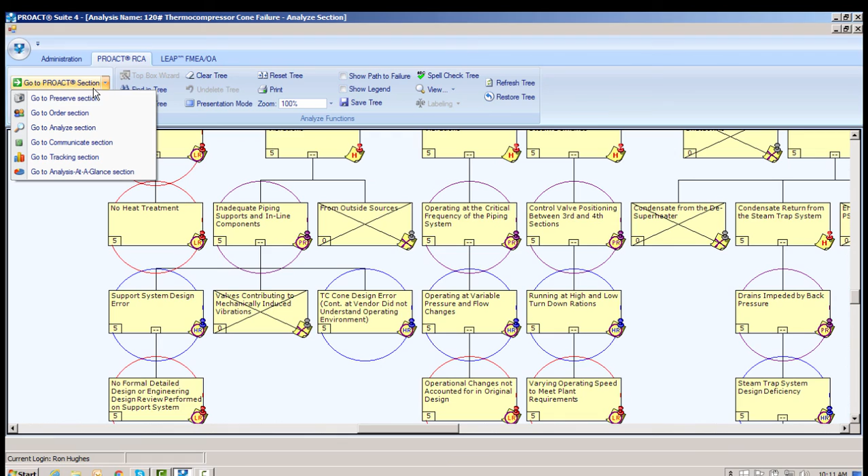Okay, it's actually a fairly large tree, as you can see. And we have lots and lots of root causes here, and we have to make recommendations that will eliminate these causes, these identified causes. So we're going to make recommendations for solutions that will take care of those causes. Now, I already told you what the event was. That's the event summary, but let's look at the findings.

The physical attributes of both failures are the result of defective welds and inadequate base metal materials that resulted in failure due to both high and low cycle fatigue during plant operations. Both weld breaks, the 3/8 inch threaded half coupling fillet weld and the thermo-compressor cone seam weld, propagated along the sulfur streak in the base material.

In addition, not only was the base metal made of less than optimum material, but also the wall thickness was too thin to carry the operationally induced high vibration loads caused by inadequate design of the pipe support system and improper fabrication of the thermo-compressor cone.

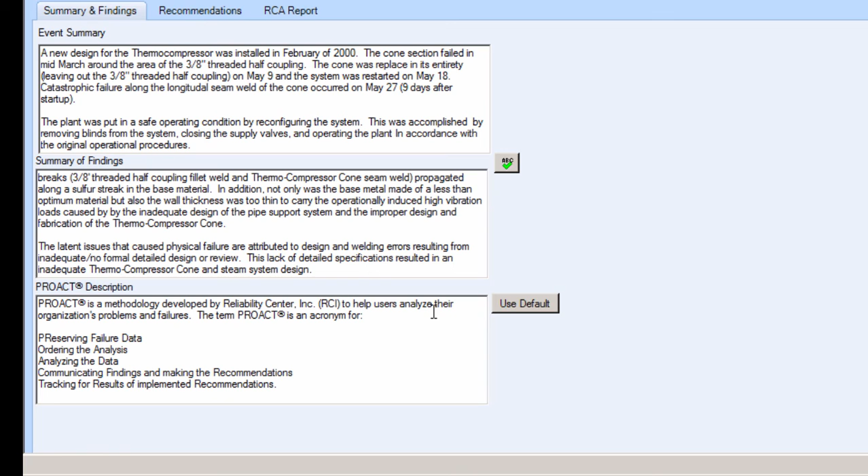The latent issues that cause physical failure are attributed to design and welding errors resulting from inadequate or no formal detailed design or review. The lack of detailed specifications resulted in an inadequate thermo-compressor cone and steam system design. So let's look at our recommendations here for our roots.